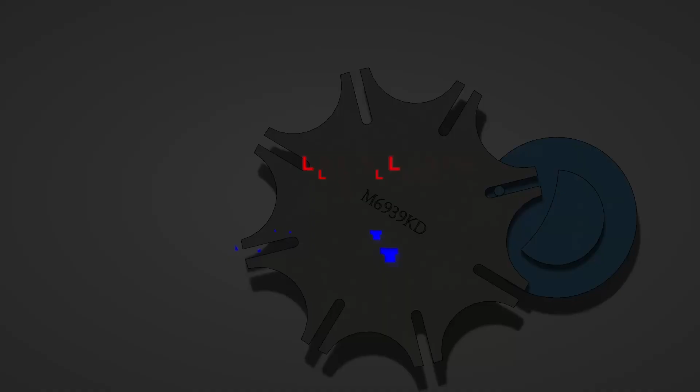We are going to develop an 8-slot Geneva mechanism using SolidWorks. We're going to assemble the parts, create a motion, and then output that motion. Let's jump right in and start learning by doing.

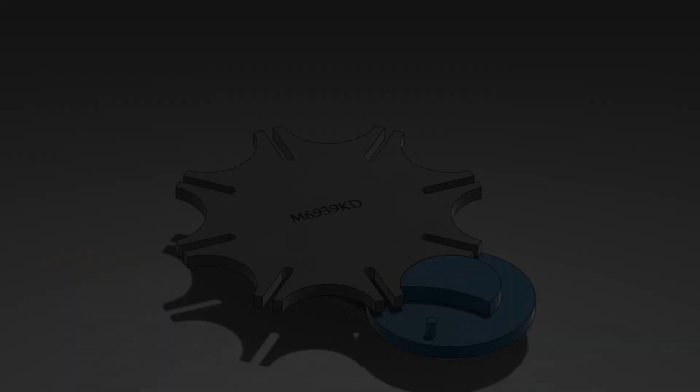Firstly, let's create our base. Let's navigate to home and then create a new part.

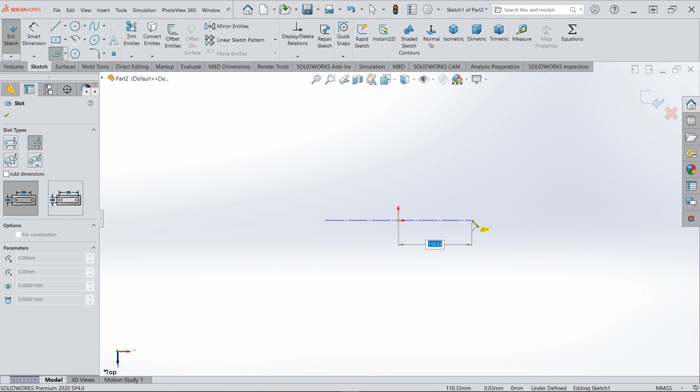Let's go to our top plane, create a new sketch, zoom in a little bit, and go to our slot tool and create a center point slot. From here you can make the length and width any value for now, because we'll define it by sketch dimensions.

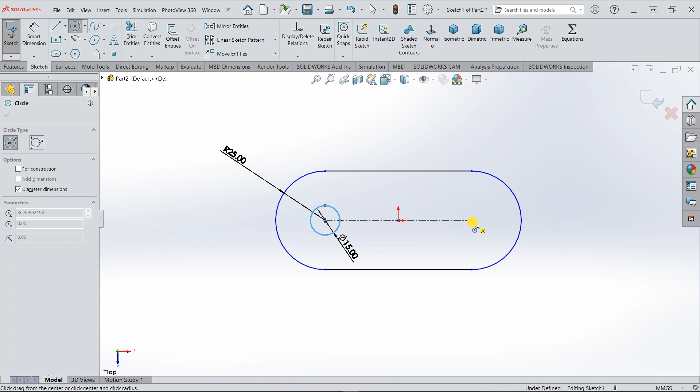Let's make this 25mm radius, and let's create two circles 15mm in diameter. Repeat the same process here, and let's give this a dimension from here to here, and we're going to make that 50.

And that's it. Now let's go to features, extrude. We're going to extrude at 10mm upward.

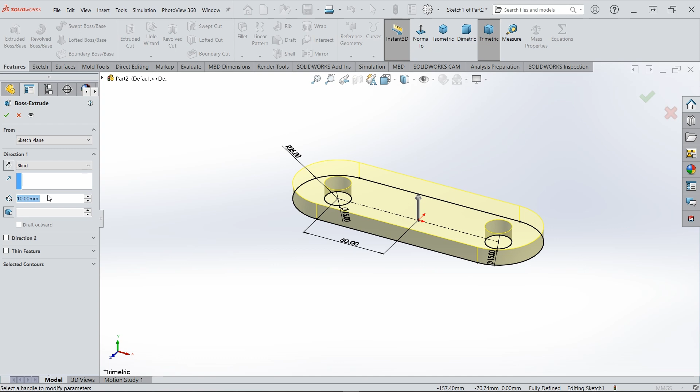Let's select this edge, hold control, select the bottom edge as well, and go to fillet. We're going to fillet these 3mm. Now our base is completed.

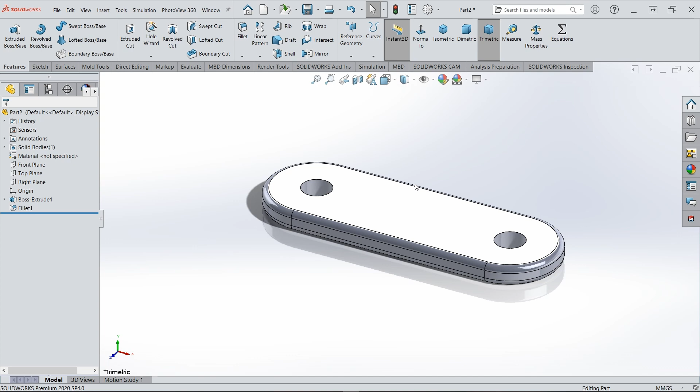Let's add a material to our base. We're going to edit material. Now our material window is opened. Let's apply AISI 304 to our base, and let's apply a surface finish to that.

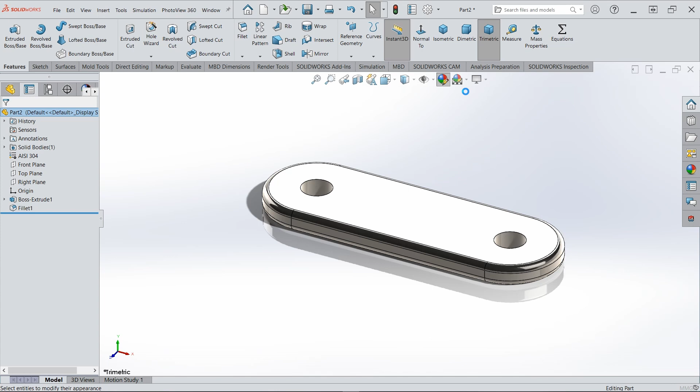So let's edit the appearance. Let's go to metals, steel, and let's double click on machined steel, and okay. So you can see machined steel is applied to our base, and our base is completed.

But always save your part. So let's call this base, and all our parts will be saved into a specific folder. So you can create a folder and save all the parts in that folder. And that's it for the base.

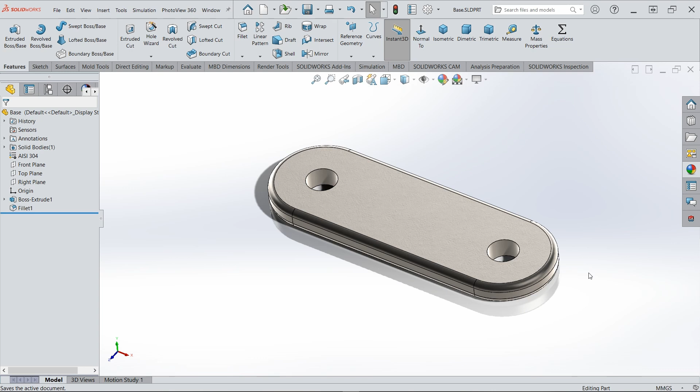Next we'll do the Geneva wheel. Let's go ahead and create our Geneva wheel. So let's open a new part. With our new part open, let's right click on our top plane, create sketch, and we're going to draw a circle from the center of origin.

You click on that and pull the mouse outward, and let's key in 184.78 millimeters, then enter. Now that we have this circle, we want to draw a line from this quadrant.

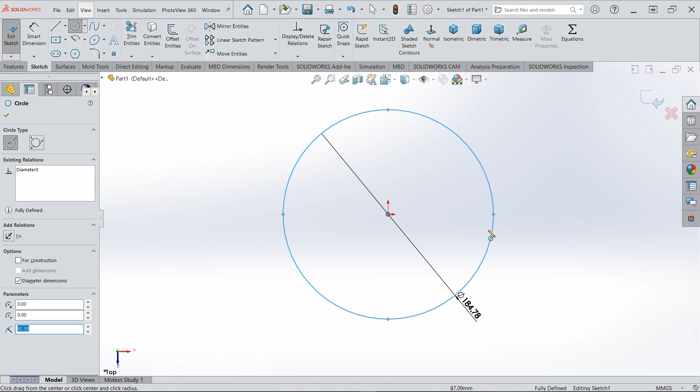So we can go ahead and draw a line from this quadrant, and let's make that 30.66 millimeters.

If you want to know how to do all these calculations, you can check out the video on how to draw a Geneva mechanism in AutoCAD. That will help you make your own calculations for any number of slots.

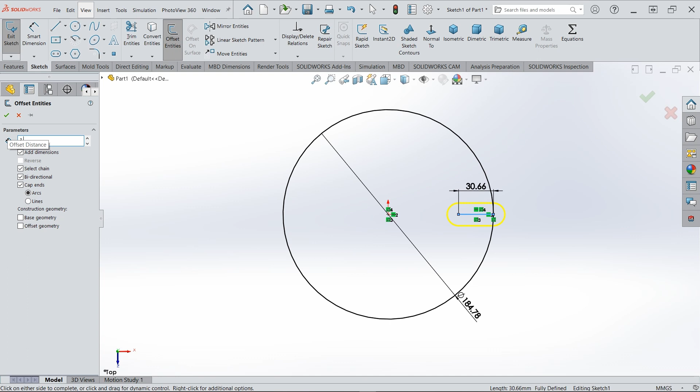So let's continue. Let's click on this line that we created, and let's offset entities. Let's make sure add dimensions is selected. Select chain, bidirectional, and cap ends, and let's change this to 3.20 millimeters and click OK.

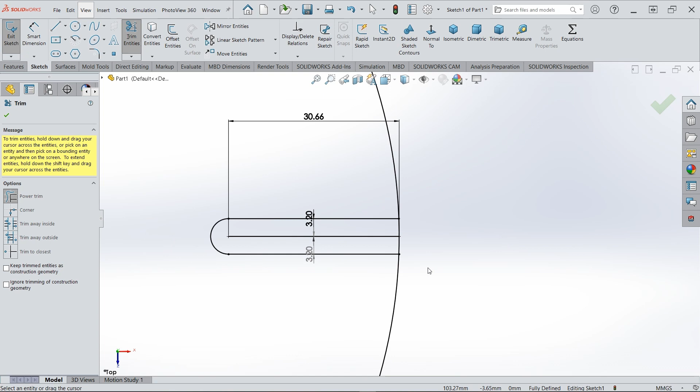Now let us go ahead and delete this cap, and let us trim. You can use the power trim to zoom in and trim the excess beyond the circle. Let's do it once, and repeat it carefully so as not to mess up your sketch.

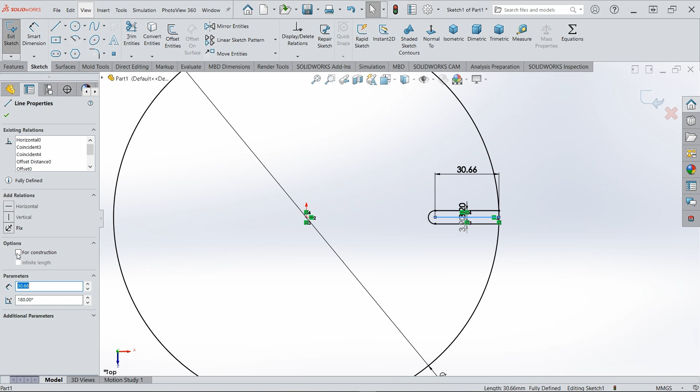Now you can click on this line, the center line, and in your line properties you can turn it to construction. So this entire width is 6.40 millimeters.

What you can now do is draw a center line from this center of origin to this quadrant at the top, and you draw another center line from the center of origin, going a little bit beyond the circle. Let's give this a dimension to these two lines of 22.5.

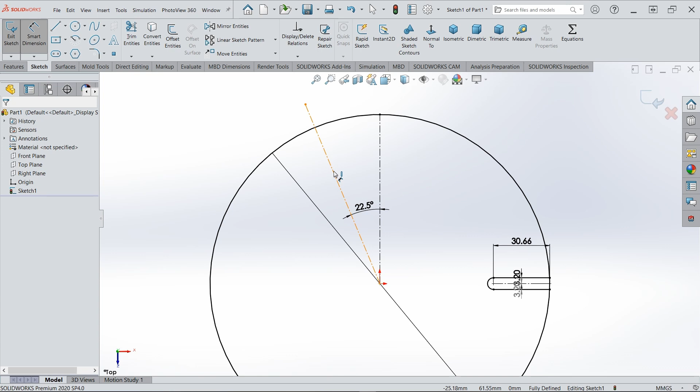That's the angle between this line and this line, and you give this one a length of 100 millimeters.

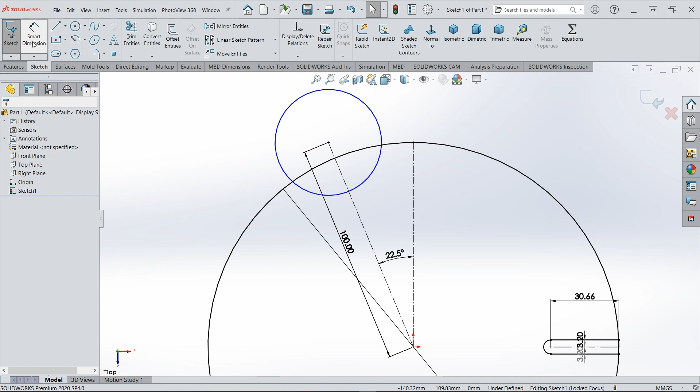Now what you want to do is draw a circle on the end of this line. Click outside, let's add a dimension and make it 58.54 millimeters.

Now let's zoom out by scrolling the mouse away from your body. You can hold Control and the middle mouse button to pan, and pull the mouse toward you to zoom a little bit.

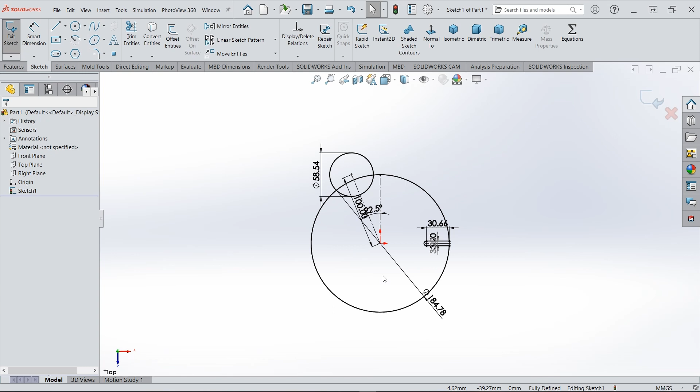Now with that done, let us go to trim. Let's use the power trim and start trimming out the big circles. Let's get rid of these, just the outside here, and then now we can zoom in and trim the part for our slot.